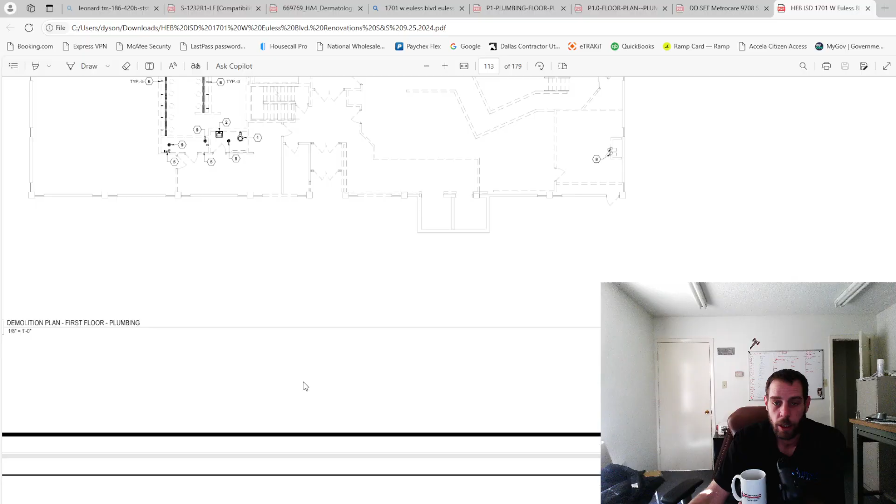This existing bathroom is a big bathroom. They're saying that stays there, but the way you guys really read plans is notes by symbol, okay? Because this is really the architect or engineer that drew these up. That's really what they want you to take note of, right? So you kind of go through and look. You see no numbers by all this, which is actually not true. Find out we're actually going to pull and replace all these fixtures with new ones anyway, so it is going to get demoed.

But like number 8 right here, okay, existing roof drain piping to be removed as required. So that one they haven't given me much info on. It seems like they just want to replace the roof drains. But anyway, so like right here, this number 6, it says cleansing faucets and associated services to be removed.

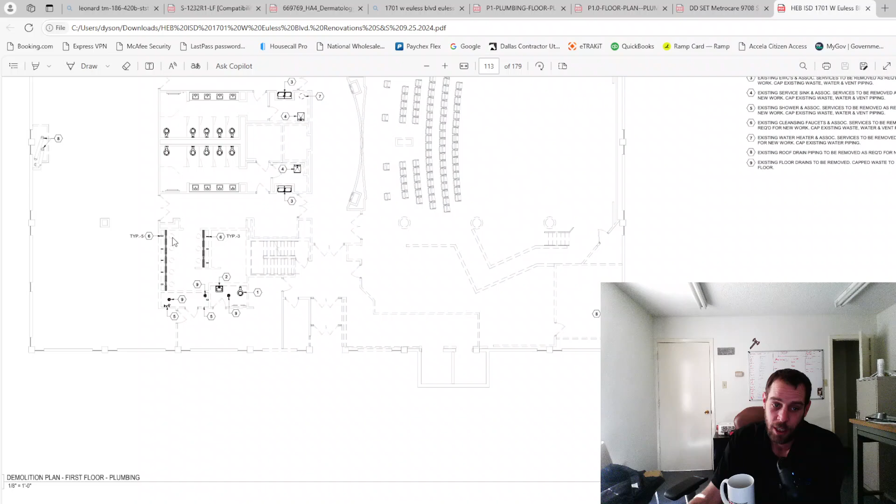That's actually a wudu. It's for like a mosque, a Muslim church, and this is like a foot washing station. These little circles are little stools, and there's like faucets. Like there's like 6 faucets on this one, 3 on that one, or 5, whatever. And there's one for the women's, and this is like a women's prayer area here, I believe, and this one's for the men's, and maybe this is the men's one. Okay, so that's the first floor, and this is just the demo, okay?

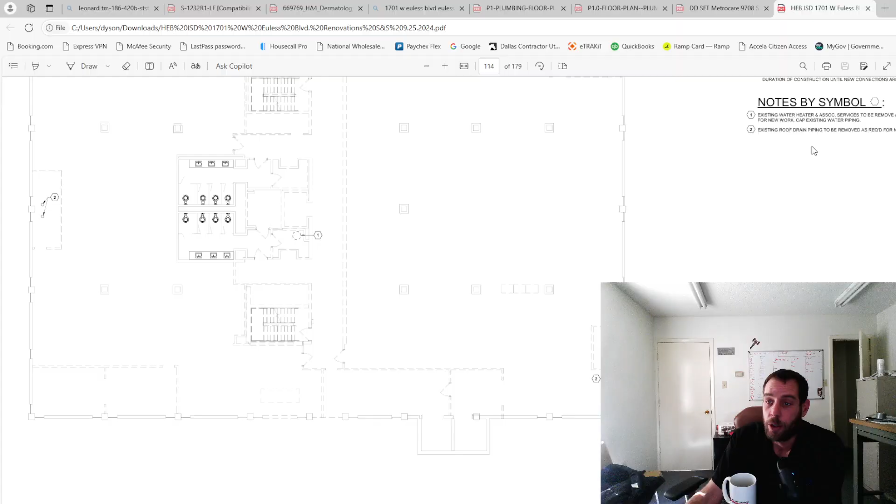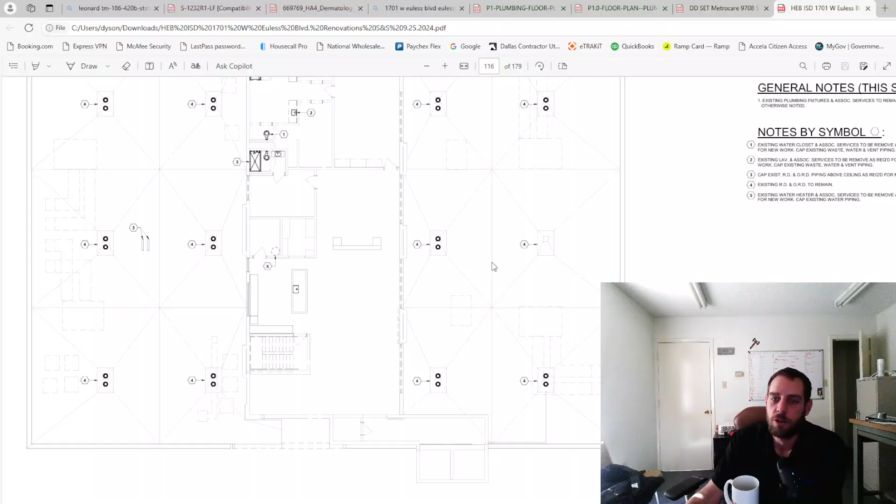Fourth floor. So the fourth floor, that's confusing. See, this is a little penthouse on what I showed you earlier. This is the inside part of the penthouse. And then these are the roof drains, which, let's see, number 4, existing roof drain, and see that ORD, overflow roof drain to remain. So they want to keep all those in place, but just replace the piping underneath, I suppose. Okay, so that's the demo part, which is kind of a project in its own, getting a price for that. But let's go to the actual plumbing pages here.

Yikes, dude. It's like freaking Frank Zappa's The Black Page. It's like a lot of stuff.

Let's take a look. This is maybe boring for you guys, but I don't give a fuck. It's my channel. You don't got to watch.

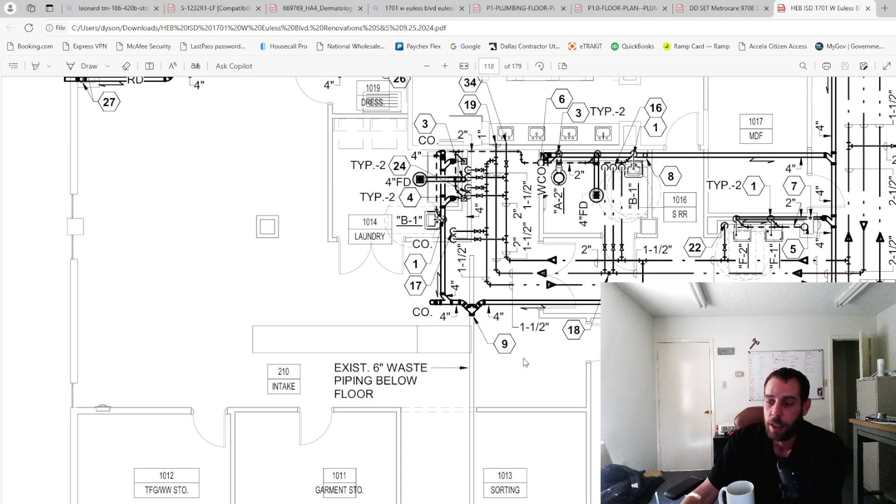Alright, so we're zooming in like crazy. So these are the roof drains here. Man, I hope you guys can see my mouse and I'm not just being an idiot. But you see, that's note 27. There's a lot of notes on this page, right? And this is the kind of stuff where, like, I come in clutch, where you're glad you hired me, right? So this is the 6-inch main where my mouse is. Hopefully y'all can see that. And it calls for me right here at number 9. Let's just go over there real quick. Number 9.

Number 9. Connect to existing waste piping. Yep. Okay, so they want me to tie into the existing building drain. Not a sewer, boys. It's the building drain. Right here. Branch off, send one up over here for this shit. And then come over here, go all the way, get out my head, go all the way over, come all the way up, branch off for this, come up, branch all the way over here for this bathroom, which obviously, boys, that's dumb as shit.

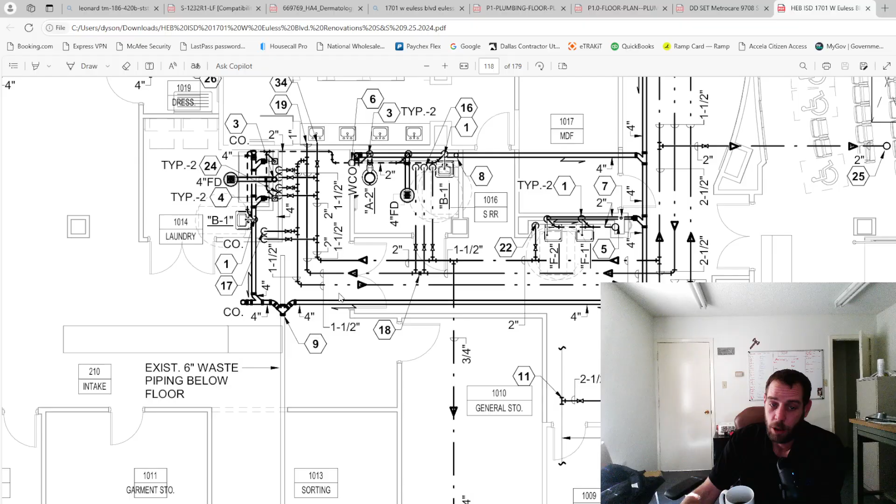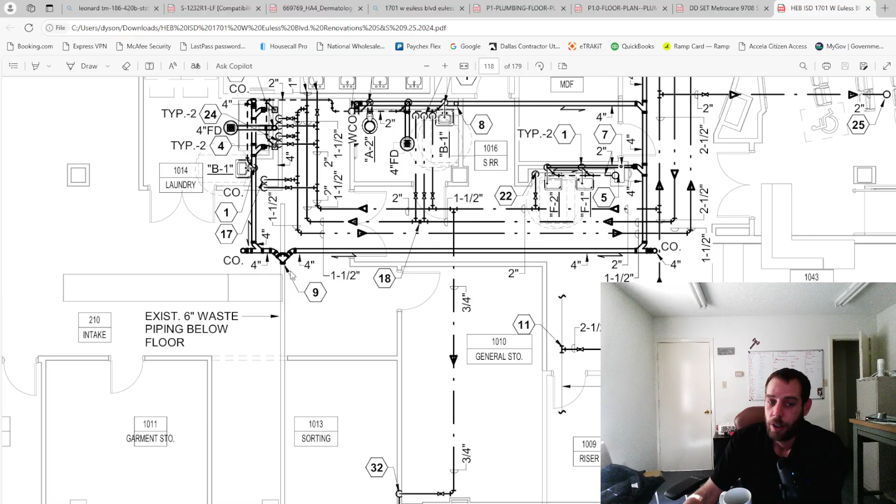I would just come right up this way, right up here. But, so they draw this out, but that's stupid. I get worried about shit like this because look how long this run is here. This bathroom, it's got to go all the way down here, then down here, then over here, then, that may be on my face, hope not, down all the way down to here, then over here, and then down, and then we finally leave the building right here. Jesus Christ, that's a long run.

Like, I'm going to alter that. I'm going to be like, guys, we're going to have to come into the bathroom and saw cut. We're not going to do all that work to just go around the bathroom, that's not worth it. That is not worth it. Right, but you got to give a price and then convince them to do that. I don't know. I'll probably put an RFI in before I even give the bid. But this is a big one.

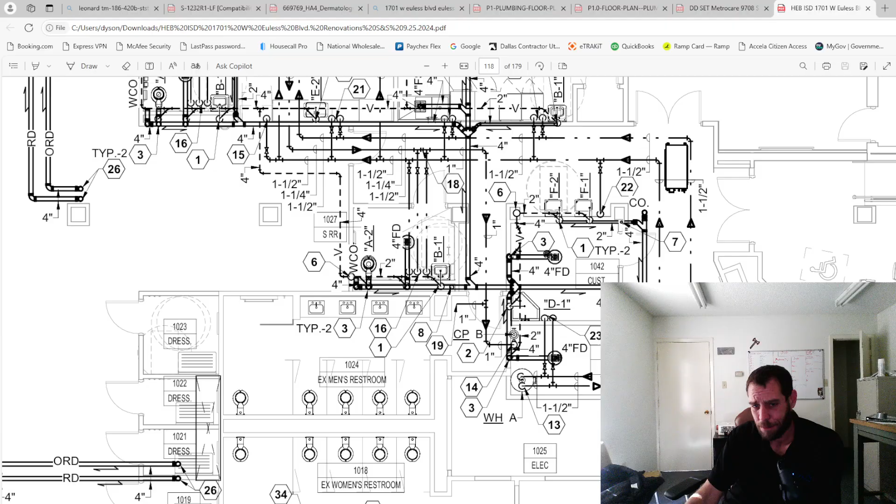There's a shitload of bathrooms, so let's zoom out a little bit, because this is just the first floor. So there's your auditorium area. Let me zoom out a little bit more. Okay, first floor, let's go to the second floor. Second floor wasn't a lot of demo. But see, I believe all these fixtures, they're saying they stay here, but I was told they want to replace them. But we're adding a bathroom here regardless, adding a bathroom there, drinking fountain, water heater, floor drain, mop sink, drinking fountain, bathroom,

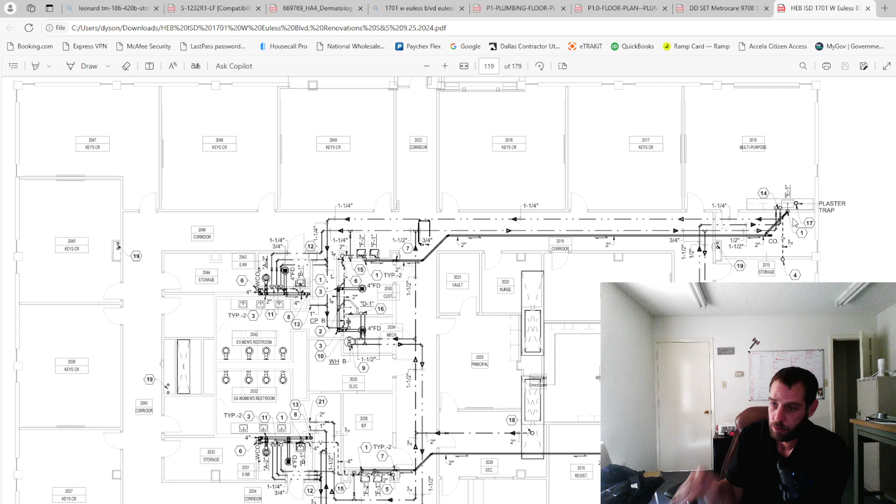sink with the plaster trap. A lot of these schools are having me put these plaster traps. It's like a small little sediment trap for plaster. They put them in art rooms a lot where I do those, seems like. Third floor, this is probably boring, but I don't care. Third floor. So, okay. Oh, I should show y'all where the stacks come up. That's probably interesting to you, right? So 4-inch, it's right here.

It's coming up from downstairs, and it wants to go this way, catch this sink, catch this floor drain, catch this toilet. I didn't even notice that was a bathroom. Come this way, put a floor clean out, come over here, catch this drinking fountain. That's why we're going to 2-inch, because it's just a drinking fountain from there. But that's how you have to look at these. You got to think about each floor as you're going up. Over here's a pretty big bathroom group that's not there at all. That's all new shit, right?

So you got this 4-inch, it's coming. Whew. See, that's a silly path, isn't it? To come all the way, I haven't even caught that yet, come all the way and then come down over here. This extra bit of run is a lot, whereas you could just, let me get my head out the way, hopefully y'all can see my mouse, come over here and go straight to it. And it's not like I'm trying to save money, but that's a lot of extra footage, and for fucking why? I'm not gonna do that shit.

Fourth floor, where the penthouse is. I guess they're keeping that baller ass cabinet they got up there. There's this really cool fucking granite countertop. What's this 12 and 11? It's probably gas shit on the roof.

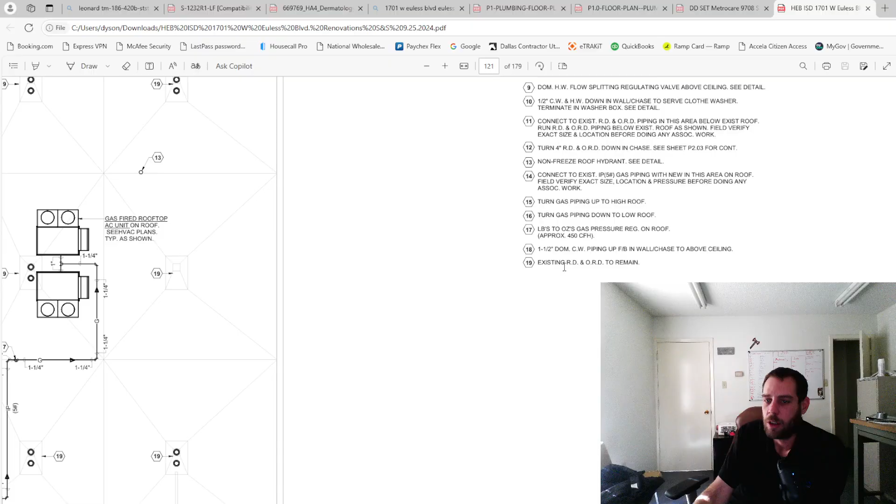12. Turn 4-inch roof drain down in chase. Okay. Connect existing roof drain, overflow roof drain piping in this area below existing roof. Run roof drain and overflow roof drain piping below existing roof as shown. Field verify exact size and location before doing any associated work. So they get you with the field verify, dude. See, that's 19 in each one of those. What is that? 19. Existing roof drain to remain. Yeah, okay. But then you see, here's my gas.

Taking 1-inch all the way up there. Oh, and then we put a regulator, I assume. Pounds to ounces gas pressure regulator on roof, approximately 450 CFH. So we're going to run a 1-inch medium pressure line up here, put a regulator there, and then take 1.25 inches up to feed a big time air handler. That's going to be a big one, or furnace. But that's all the gas we got, so I'm not going to get too into the nitty gritty with you guys on it.

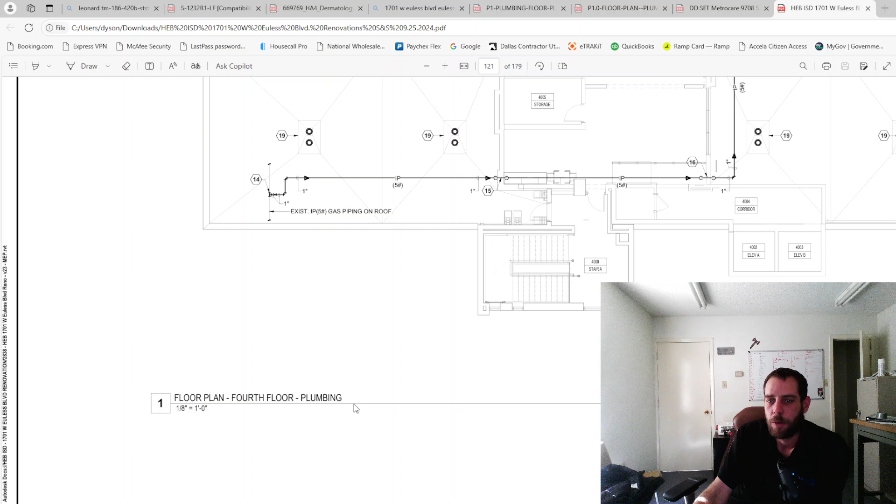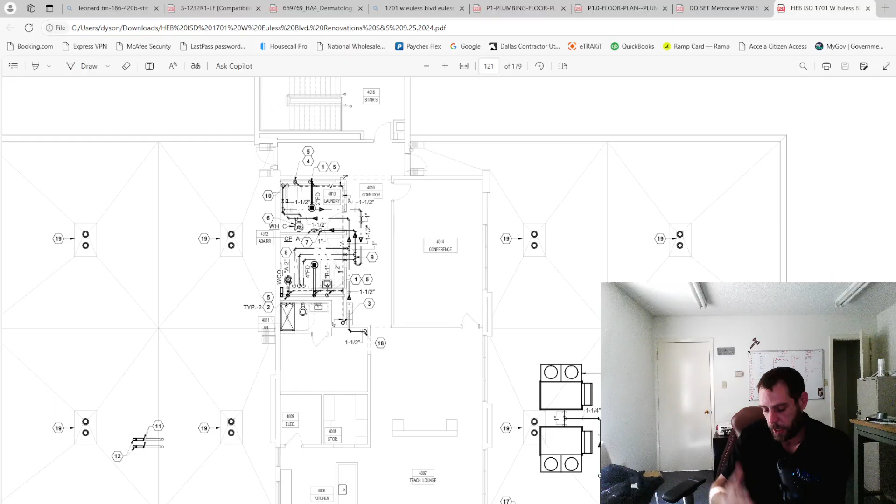But this is really step one. It usually takes me about 2 minutes, maybe 5 minutes, to familiarize myself with the plans like I just did here with you guys. And then I'll go through and actually start counting fixtures. I'll be like, okay, toilet, shower, lavatory, floor drain, toilet. And just start getting a count. I use these dry erase little papers so I can scribble as I go, and I'll get a count on all the sinks and everything. And I know more or less what everything costs, right? So the first thing I do is get an idea of what it's going to cost me for fixtures.

And then I start thinking, okay, this is a 3,000 square foot space, and this is just for rough estimation, right? But I'll think this is probably about 5,000 square foot. So just the copper piping on this floor alone is going to cost me about $8,000. Well, not $8,000, probably about $6,000 to $7,000 because prices just went up. About $6,000 on pricing, and then about $2,000 on insulation. So I'm probably looking at about $8,000 on just the copper. And then if we're doing PVC or cast iron, that determines the drain pricing.

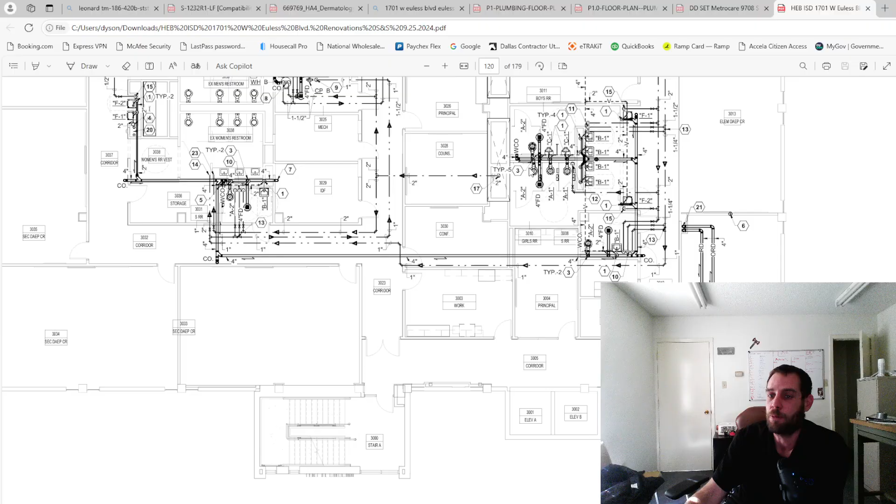But I get that material pricing, like the fixture pricing, and then it's not that hard for me to do the labor, like rough in: how long is it going to take me to get all the plumbing underneath the floor for all these bathrooms. Say as an example, I'll figure this bathroom, and this is just the way I do it, everybody does it their own way. This area here is going to take me like 3 days to rough in. This area here, like 2 days. This one, like 3. But I might say, okay, the third floor, I'm looking at 8 days rough in.

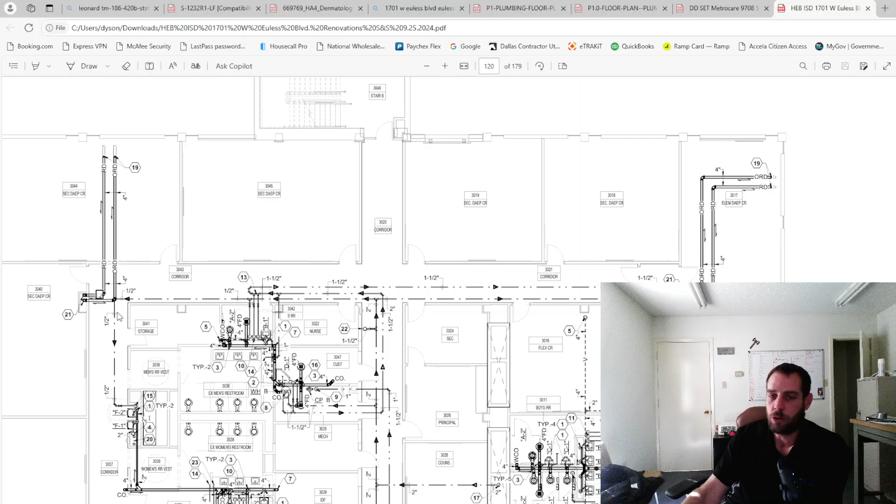I'm looking at 10 days top out, 4 days on setting fixtures, and just associate a certain amount of cost for each day for that crew. And you've got to be thorough, go through the plans, not miss nothing. And then once I get that total cost, I usually take that number and divide it by 0.7. And that is the secret to business. Figure out what the fuck it cost you, and then divide that number by 0.7.

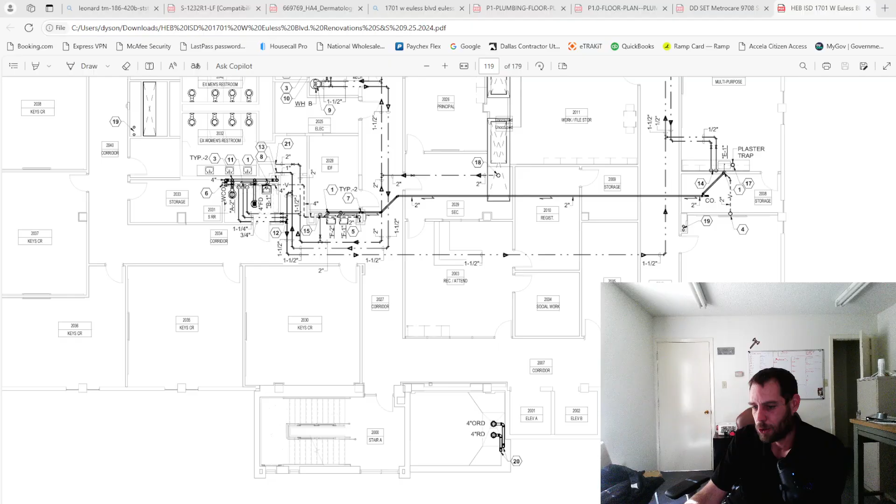So like if I think this one's gonna cost me, let's see, okay, we don't need to look at the plans anymore, boys. Whoa, where are you going? Alright, did not do this right. Okay, whatever. Plans go away.

Okay, so anyway, let's just say that this job cost me $300,000. I'll take that number, divide it by 0.7, and that equals $428,571. And that's how business is done. It really is. You just got to know the cost of goods sold, and then what kind of margin you can get on it. I could potentially get away with a 20% gross on this one, say the cost is $300K, which I don't know yet, I'm guessing, divided by 0.8, and that's $375,000.

But that's not that great, because I have to spend $300,000 to make $75,000. Whereas if I do a 30% gross, I make $128,000 after I spend $300K. Pretty good return. So that's how I do it.